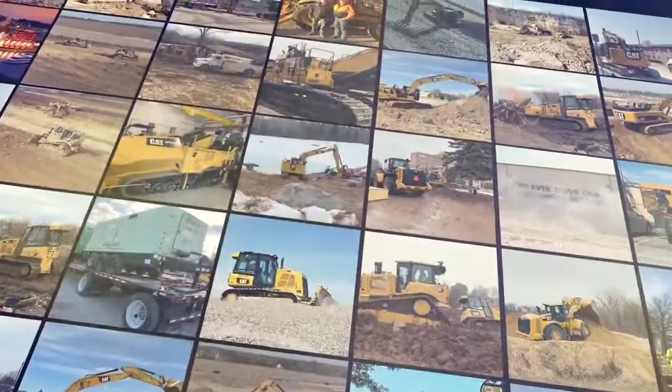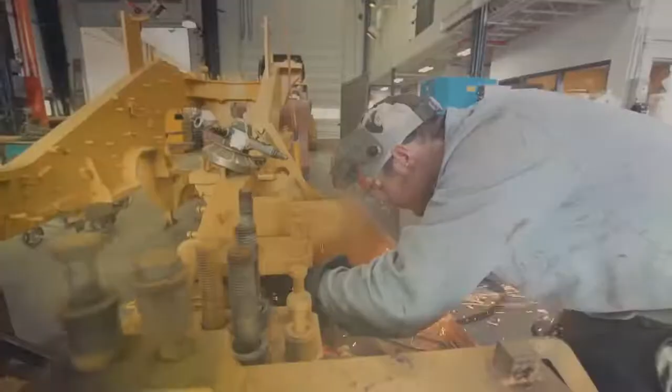In these challenging, uncertain, uncharted times, you stand strong. No matter the conditions you face, you get the job done. You are the backbone of our communities. You are the hardworking men and women that continue to build. We're honored to call you our customers and our employees. We thank you for the work you've done and the work you continue to do. Together, we'll get through this.

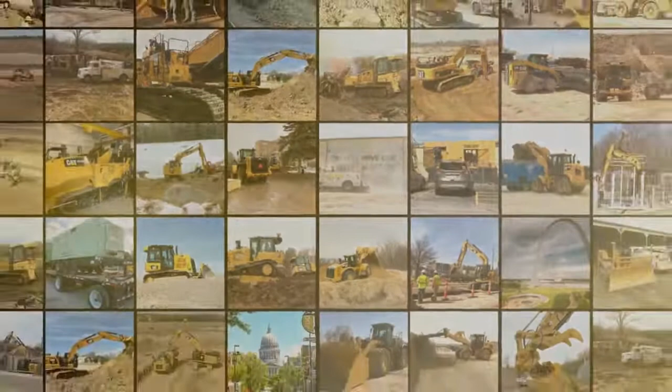Hi, good morning. Some exciting things happening down in St. Louis City. We've got the new soccer stadium being built, we have NGA West, and we also have Downtown West. So there's a lot of projects coming about here with road work in St. Louis City.

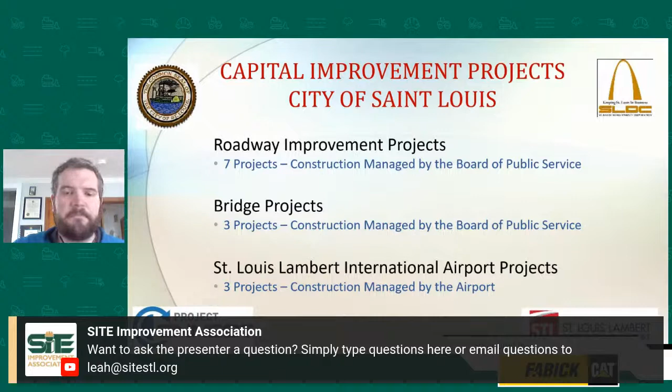The first project we're highlighting today is the Louisiana Calm Street improvements project. This focuses on the stretch of Louisiana between Gravois and Meramec, a north-south corridor in the southeastern part of the city. It will focus on retrofitting traffic calming measures such as speed humps, traffic circles, bump outs, and similar features. It will feature the business districts on Meramec, Chippewa, and Cherokee, as well as the Gravois and Marquette parks that it passes by. We expect that one to go to bid in the next several weeks, though I don't have an exact date yet.

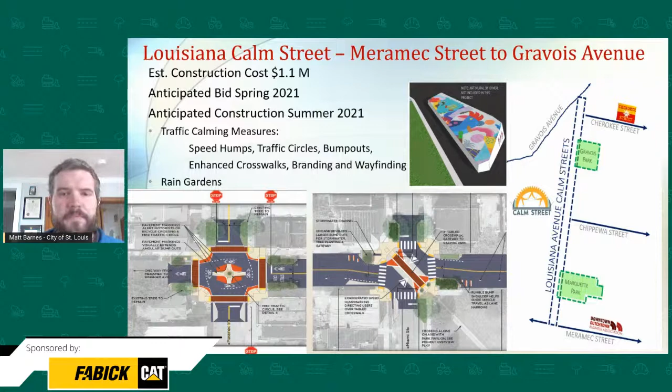Next up is the I-64 at Jefferson City Streets project. This corresponds with the MoDOT work on I-64 as well as the MLS Stadium project, and features the city streets portion. You can see on the map several of the different streets where we'll be making improvements, streetscape amenities, bump outs, lighting, multi-use path, signal improvements, transit, and Metro bus stops.

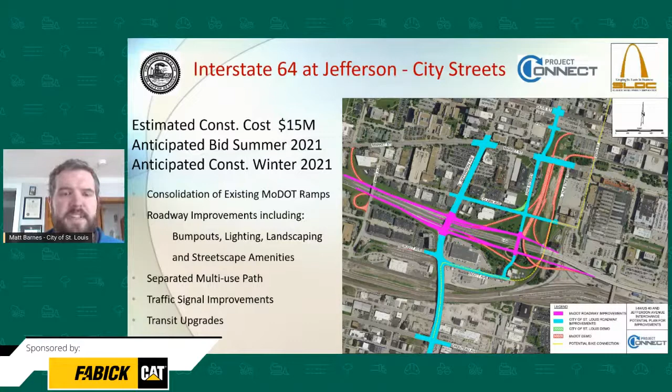The next project is the 7th Street improvements, Washington Avenue to Walnut. This is a fairly standard streetscape project improving a north-south corridor in downtown. It will improve access to the convention center main entrance, and includes bump outs, sidewalks, ADA and signal improvements, landscaping, and all the standard streetscape project parts.

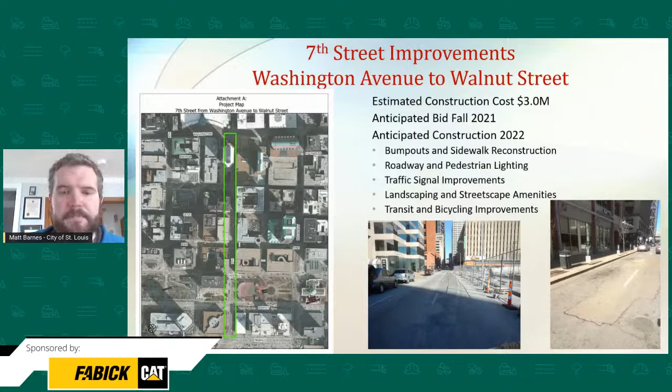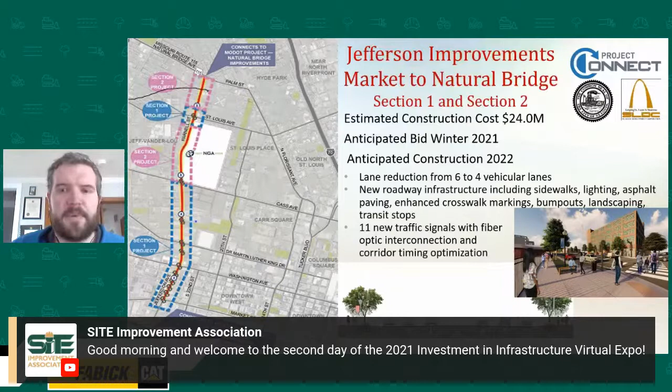Next up, we have Jefferson Improvements, Market to Natural Bridge. This project will build on what was done in the previous Jefferson project, expanding the improvements north up to the new NGA campus and facility. The sections shown on the map relate to different federal funding sources, but it's all being planned and built together. It's all being bid, and it will be bid and built at the same time.

The next roadway project we have is the Goodfellow Signal Interconnect, Delmar to Halls Ferry Circle. This will improve the signal and fiber network as well as ADA access along a main corridor in the northwest part of the city.

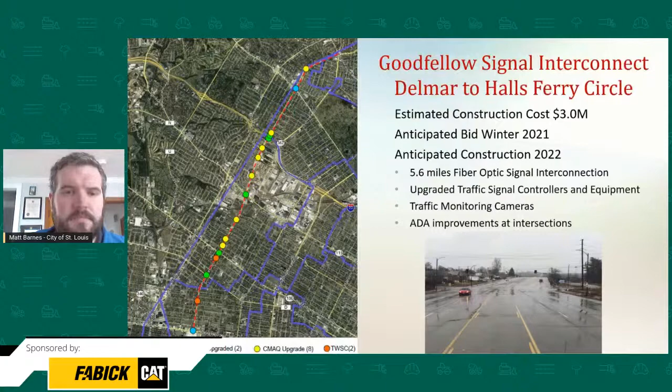Next up, we have the 20th Street multimodal improvements, Market to St. Louis Avenue. This will improve the pedestrian, bike, and transit links along this corridor. It will also provide an additional link between the improvements made on Jefferson and I-64 downtown west as part of the other project, up to the neighborhoods around the NGA.

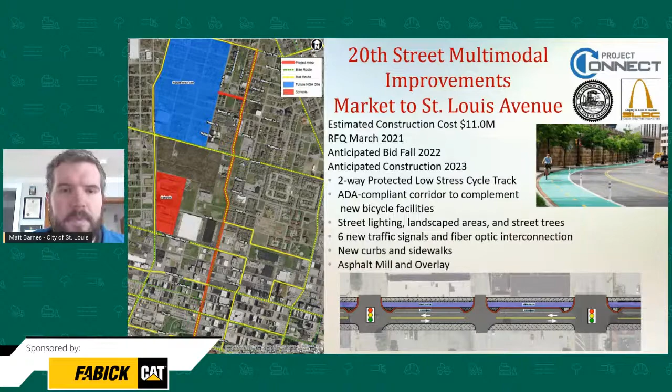Next up, we have the Tower Grove connector: Tower Grove Ave, Magnolia to Vandeventer, and then Vandeventer, Tower Grove to Sarah. This project includes a 2-way protected cycle track, and it'll improve the bike and pedestrian link between Tower Grove Park and the surrounding neighborhoods, including the Forest Park Southeast neighborhood, commonly known as the Grove, and then the Central West End and SLU campus. We actually started a little bit of the work at Magnolia as part of a project about a year ago, doing intersection improvements around Tower Grove Park. We already installed a bike signal and other features for that layout, but now it'll finish off going north there.

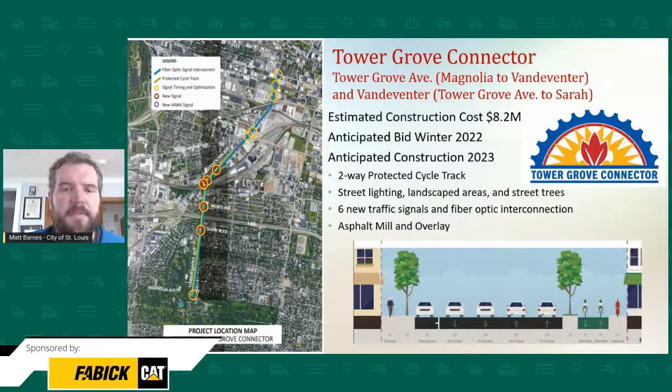The first bridge project we have coming up is the Hamilton Bridge reconstruction. This is an area just north of Forest Park. It's the bridge that will be fully replaced above the Metrolink tracks, which will require coordination with Metro since we'll be working on their right of way.

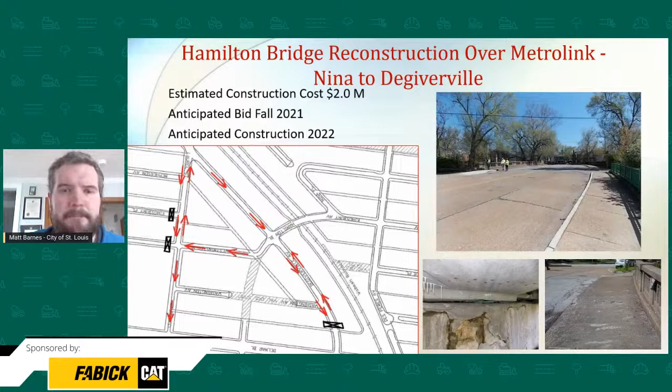The next bridge project is the Southwest and Columbia Bridge reconstruction. The Columbia Bridge, if you're familiar with the area, is on the eastern edge of the Hill and is currently closed. This project will involve tearing down both bridges and replacing them with one new bridge that will have a higher clearance for the railroad. This work will need to be coordinated with the railroad during construction, which I believe is Union Pacific, the same rail line we dealt with on the Kings Highway Bridge project a few years ago.

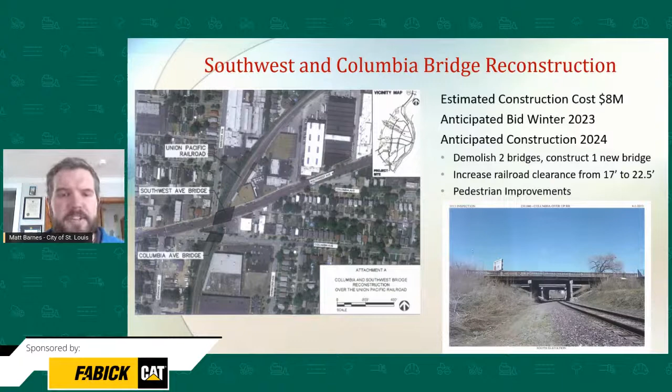The last bridge project on the BPS side is the Compton Bridge reconstruction, Chouteau to Spruce. This is a very, very long bridge that we're going to shorten using MSE walls. It goes over the rail yards and Metrolink tracks in the area near the Grand Metrolink station, if you're familiar with that area, and it will require coordination with the various rail lines and stakeholders underneath there.

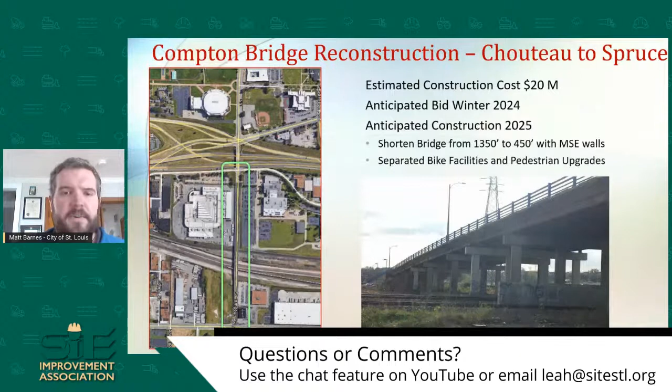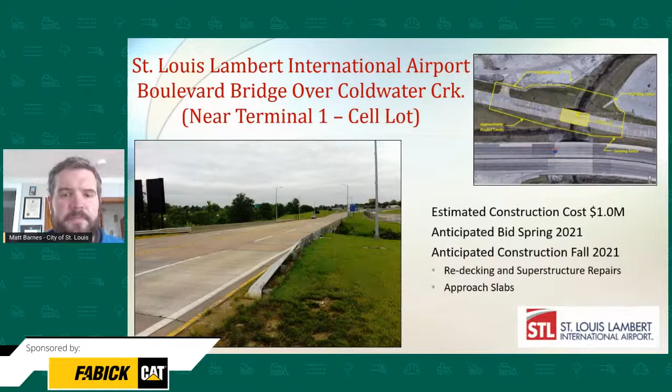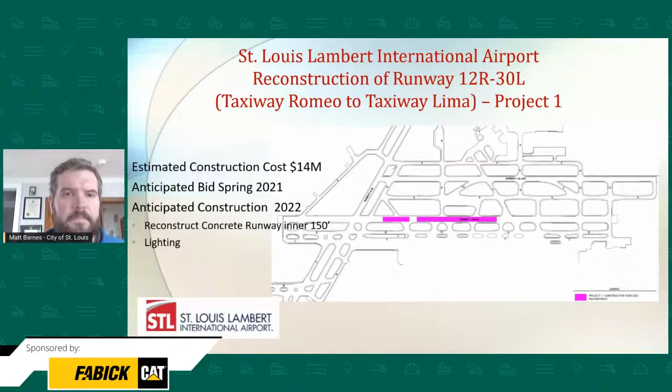The next two projects that we're featuring out at Lambert are airfield side projects that require all the extra safety measures to work on the airfield. They're both related to the reconstruction of runway 12R 30L. The first project, the area of work is highlighted here and that'll be included on this project. The second project on runway 12R 30L involves this area shown in the highlighted section of the image here.

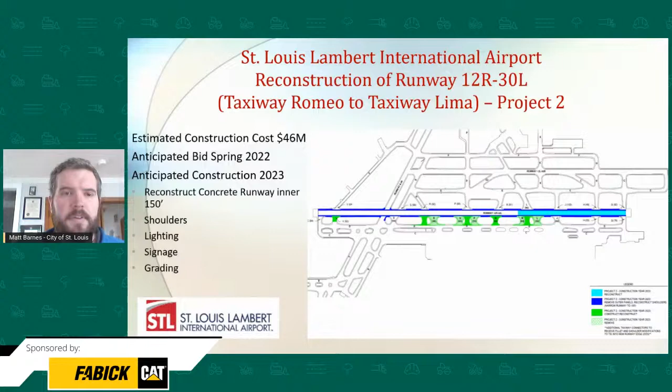And that is all we have. Thank you for your time this morning. If you have any questions, let me know.

All right, thank you Matt. I'm looking over at the questions. I think you might have escaped without having any questions to answer. So good for you, Matt.

Nice presentation, a lot of work going on in St. Louis City. We hope that the downtown area comes back to life after COVID. I'm sure it's been pretty odd down there without thousands of people going to Cardinals games or Blues games. The nice part is you don't have all the traffic in there to get the road projects done. So let's hope we can get that completed and get everyone back together. Yeah, I know the street department did a bunch of paving this summer without all the other events going on.

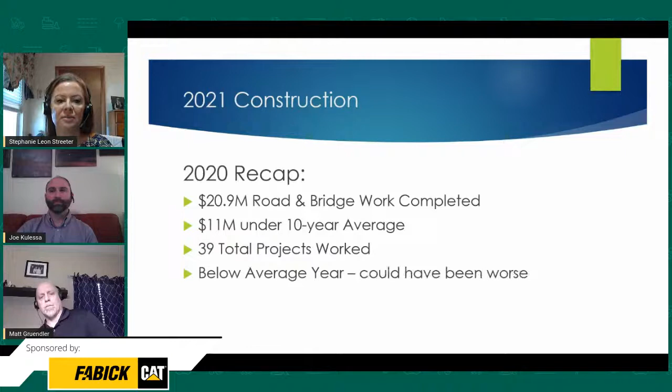In 2020, we were able to complete $20.9 million of road and bridge work. But as I indicated, and as you saw on the graph, that's $11 million under our 10-year average. It's 39 total projects worked. It was a below average year, but it could have been worse. And thankfully, we weathered 2020.

Besides COVID, some of the things we're up against is just funding for transportation in general. St. Louis County has, over the course of time, invested a lot of time, sweat, tears, and money to build up the transportation system that we have.

We have over 3,100 lane miles of road, 1,300 miles of sidewalk, over 600 signals, and nearly 200 bridges. So we have a lot of infrastructure in the field. We value that at $1.78 billion.

So it's worth investing, and we're at a point in our process where we're having to do more preservation work. Our operating budget is about $55 million on the transportation side. We would love to have an appropriation level for capital projects at $71 million, and if we did, we'd have $126 million to bring to the table. But that's just to maintain the status quo.

When you look at the revenue we have now and going forward, we're going to be flat. We have transportation sales tax, gas tax, property tax, franchise fees, and fees from permits and interest on money held that are generally flat. Maybe some are slow to increase, some slow to decrease, but generally we're flat.

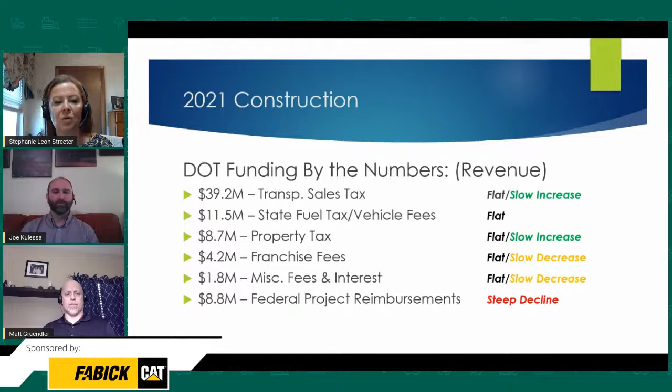So all of those funding sources combined yield about $74.2 million of revenue, which is great—that's nothing to sneeze at. But as compared to our needs, it is short.

And so what we end up doing is the needs don't go away, but instead of appropriating the $71 million that we need to appropriate, our highest year in 2018 was nearly $42 million. But that was the highest year. So we don't appropriate what we need to.

Obviously, when you appropriate dollars, that eventually leads to construction activity in the field. And so, when you can't appropriate what you need, you don't do as much as you need to in the field. So what's in store for 2021 for St. Louis County?

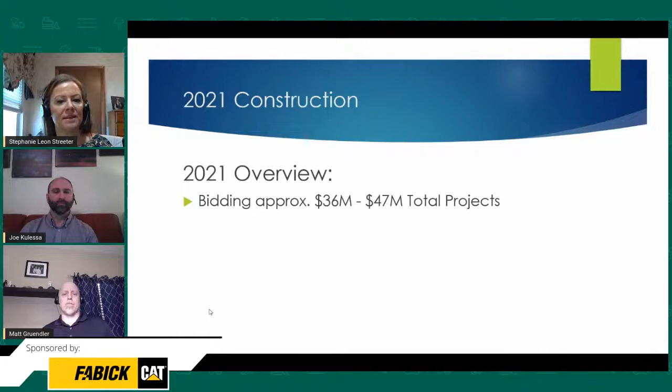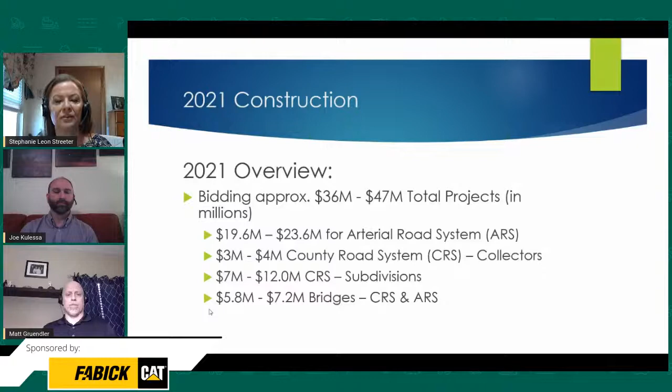We do expect to bid about $36 to $47 million of work, which is good. If we hit the high side on $47 million, about $24 million goes to our arterial road system projects, about $4 million for collectors, $12 million for subdivisions, and $7.2 million for bridges on both the CRS and ARS side. So we have a little bit less than $1 million for signal and miscellaneous work.

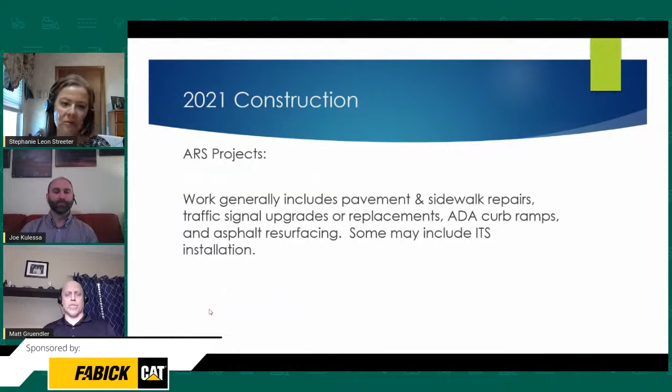So when we look at what we're actually intending to do on the ARS projects side, just keep in mind that our ARS work is usually pavement and sidewalk repair, signal upgrades or replacement, ADA improvements such as at our curb ramps, some asphalt resurfacing, and some ITS project installation.

This is one of two slides, 12 projects in total. The first three, I want you to take note of. The bid opening is expected spring or summer of 2021, so those are the first out of the gate on the ARS project side. They do not have federal funds, which means they're county funded and will have MWBE requirements. That's ARS improvements area A, infrastructure improvements on Midland, and Barrett Parkway area improvements.

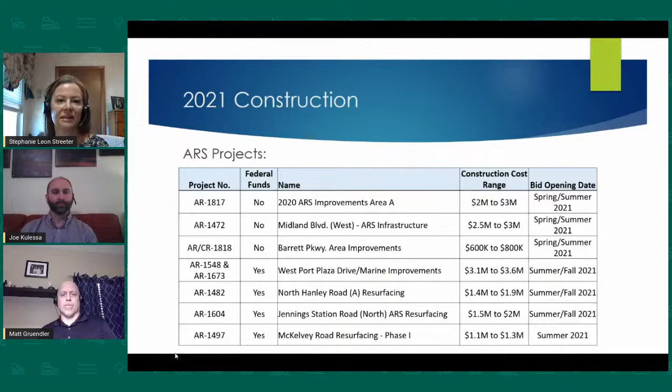And please note, on all of the ARS projects with federal funding, those dates are very much in question right now due to COVID closing the courts. We have a number of property acquisitions that need to be completed before those projects can be let. We just had another update yesterday that we still don't have any information on when the courts are going to open to move those projects forward.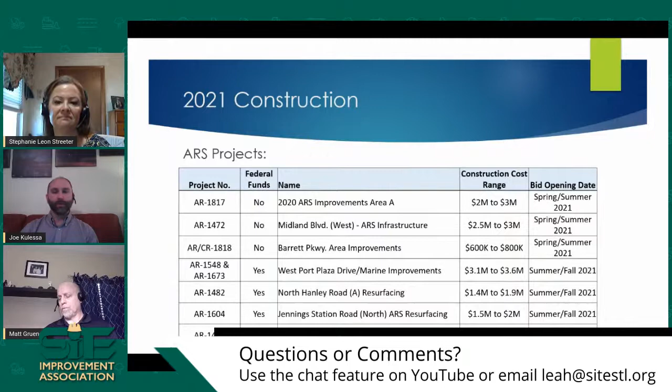So those dates, unfortunately, are probably going to slide back on a number of those projects.

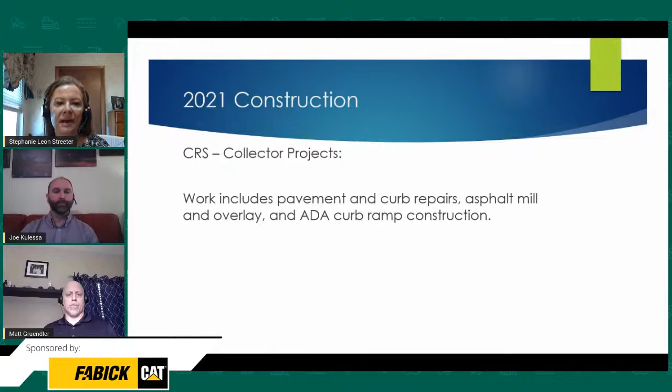On the collector side, that is pavement and curb repair, mill and overlay, curb ramp repair and construction to meet ADA requirements. We have two jobs, not federally funded, so MWBE goals apply. Bid openings are expected spring of this year. Area B is South County: Suisun Hills Drive, Pottle Avenue, and Keller Road. Area C is somewhat south and west: Hannah Road west, Valcourt Avenue, and Edian Park.

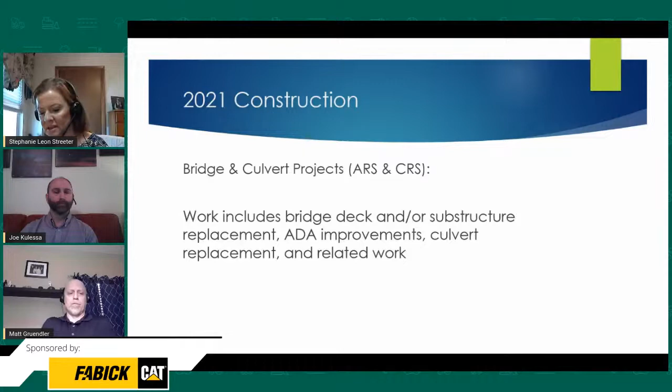Our bridge and culvert projects span the ARS and CRS system. We're talking about bridge deck replacement and/or repair, substructure replacement, ADA improvements, etc. This is 7 projects, and it's a mix—some federally funded, some county funded. The two anticipated to have earlier bid openings are the first two, so MWBE goals apply: Lockwood Avenue Culvert and Lackland Road Culvert. The other bridge projects fall later in the year, and in some cases early 2022, such as Wyncrest Drive Bridge.

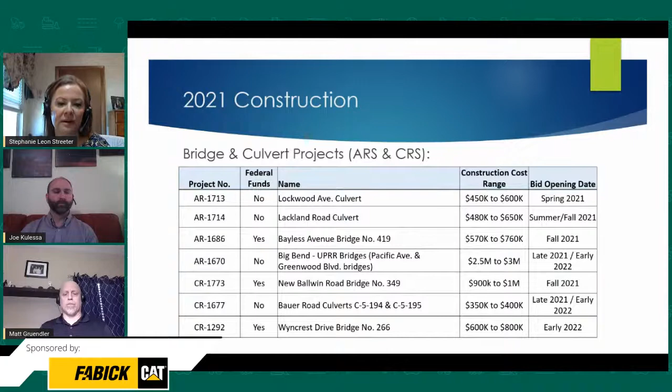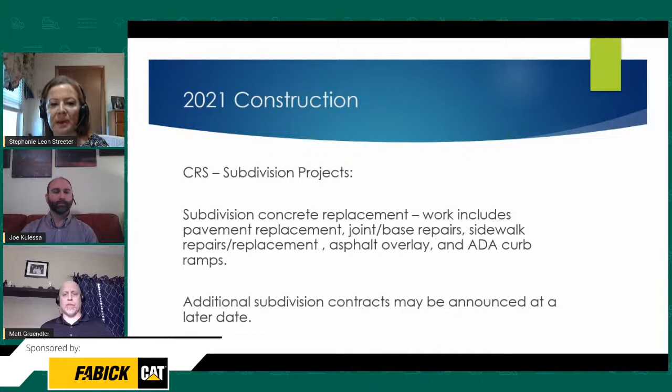Our subdivision work—we'd love to do some wholesale replacement since some of our subdivisions have been in place for many years. But this is more spot concrete replacement, as much as we're able to do, and as the requirement presents itself. We also have joint and base repair, sidewalk repairs, some asphalt overlay, and more curb ramp work.

We have 3 areas: C, B, and D. C had a bid opening already in January, and B and D have bid openings coming very quickly—one's March 3rd, and one's March 17th. They're not federally funded, so MWBE goals apply.

I have the list of subdivisions, but for each one there's a number of them. So if you want that particular information, ask the question or ask us post this expo, and we can provide you that information, provided we're not in any period of solicitation. Those are currently in solicitation, so those would be under a cone of silence. Please go review the packages online and email questions to the authorized contacts.

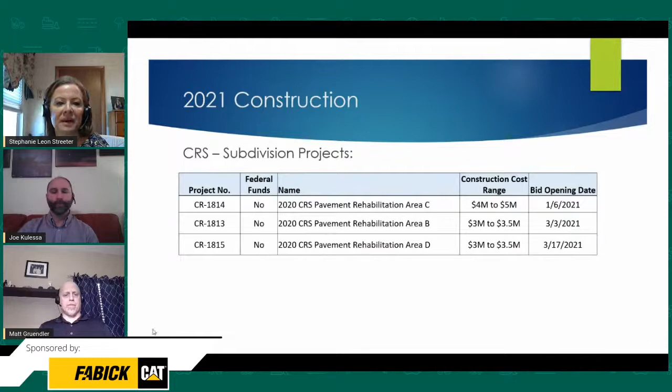Thank you, Joe—they came to mind, so I'm glad I said it. Our miscellaneous projects include a pedestrian signal at Music Avenue, bid opening March of 2021, and then guardrail on Baumgartner Road to come later this year. No federal funds, so MWBE goals apply.

In these challenging, uncertain, uncharted times, you stand strong. No matter the conditions you face, you get the job done. You are the backbone of our communities. You are the hardworking men and women who continue to build. We're honored to call you our customers and our employees. We thank you for the work you've done and the work you continue to do. Together, we'll get through this.

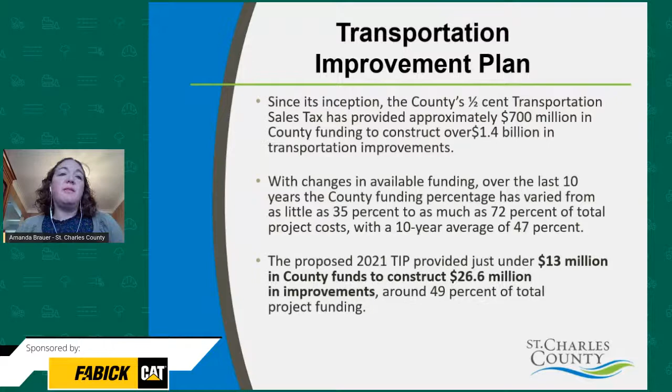The proposed 2021 TIP provided just under $13 million in county funds for $26.6 million in improvements throughout the county, so 49%. This was kind of a lower year in terms of what we distributed. However, the previous year was very big with the I-70 design build—the county contributed $10 million to that, and several other big projects. So we kind of used this year to catch up, but we have not seen a lull in funds, and we're still steadily seeing about $30 million a year in sales tax revenue for transportation projects.

So the 2021 to 23 Transportation Improvement Plan includes over 60 projects and approximately $80 million in sales tax funds for construction projects throughout the county. Just remember, when I say 80 million in half-cent sales tax funds, that means the overall projects are probably around the $160 million mark or more. This is just a list of the overall projects in the TIP and what the county's contribution is. I'm not going to sit on this for too long, but if you want to go back and look at the presentation, you can do that and let us know if you have any questions on any of these.

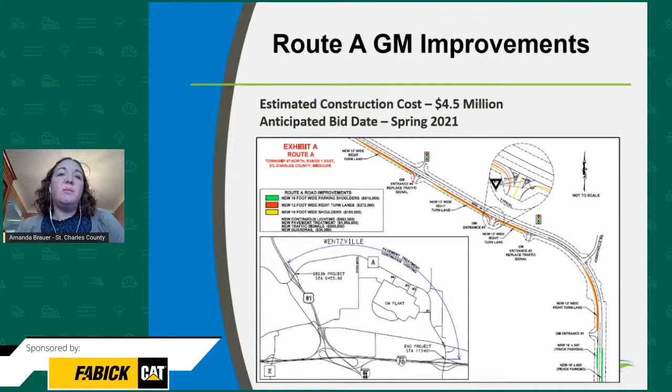Our first project is Route A, GM improvements. This is a MoDOT route. The county submitted for governor's cost share on this project and was awarded about $4 million in cost share funds. The estimated construction cost is around $4.5 million, with an anticipated bid date of spring of 21. This includes new parking shoulders, right turn lanes, additional 10-foot shoulders, lighting, pavement treatment, traffic signals, guardrail, and fiber throughout the corridor. This is a significant project, and we're excited to get these improvements done for the GM plant and all that they're doing out there.

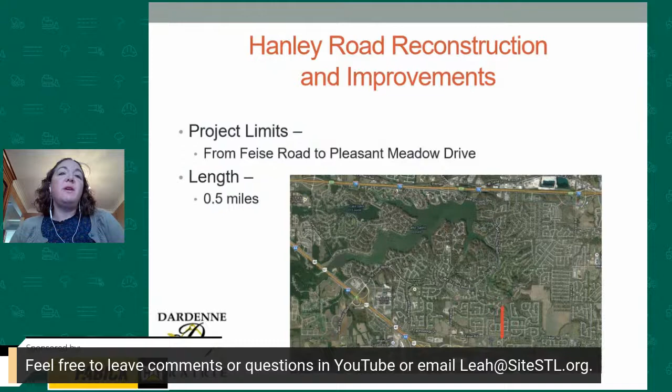From Dardenne Prairie, they will have the Hanley Road reconstruction and improvements from Feise to Pleasant Meadow Drive. This project is replacing two existing 10.5-foot wide travel lanes with new 11-foot wide travel lanes, enclosed storm sewers, and sidewalks, with an estimated construction cost of $1.5 million and a bid date of spring of 21.

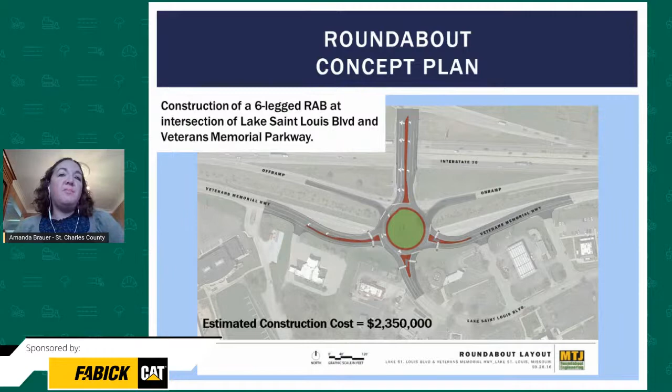Lake St. Louis roundabout at Veterans Memorial Parkway. This is the construction of a 6-legged roundabout at the intersection of Lake St. Louis and Veterans Memorial. The estimated construction cost is $2.35 million. Right-of-way acquisition is underway, and I believe they anticipate a MoDOT letting in March. I believe that's still on schedule for that date.

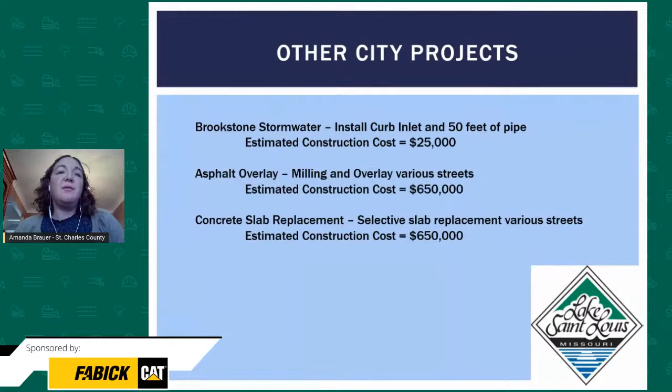Other city projects include the Brookstone stormwater project, installing a curb inlet and 50 feet of pipe for $25,000; asphalt overlay for $650,000; and concrete slab replacement for $650,000. I heard back from Lake St. Louis, and they provided this information. The other cities likely have similar projects that I don't have information on, so always look at the city's website or reach out to the cities individually to see what maintenance projects they have going on.

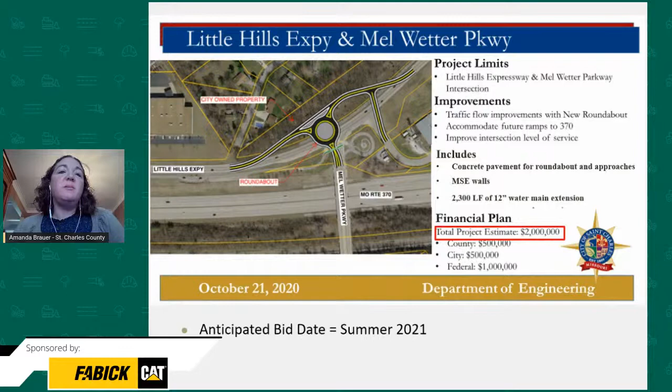City of St. Charles has the Little Hills Expressway and Mel Wetter Parkway roundabout. This will accommodate a future ramp to 370 and improve the intersection level of service. It includes pavement for roundabout approaches, MSE walls, and 2,300 linear feet of 12-inch water main. The estimate is $2 million, and the anticipated bid date is summer of 2021.

The Zumbehl Road bridge culvert replacement between Regency Parkway and Dierbergs. This is a new reinforced concrete box culvert. Construction is expected to begin in the fall when federal funds are available. This has an estimated cost of $2.5 million.

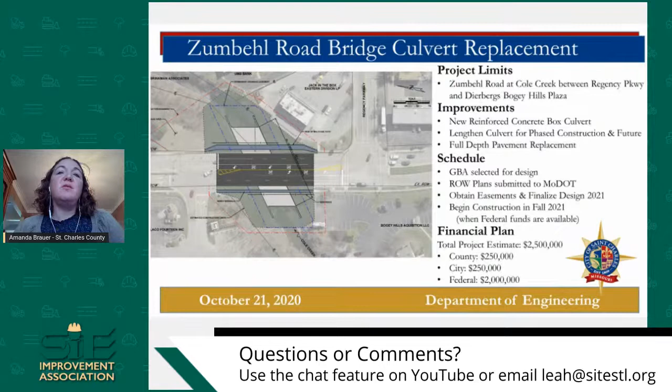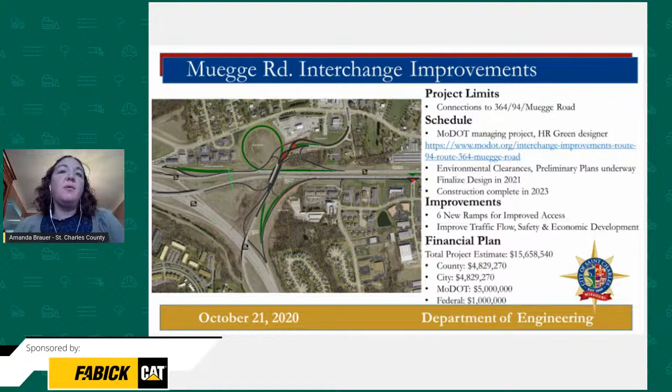Fall. Muegge Road interchange - MoDOT is actually handling everything on this project, but I wanted to give it a quick mention. They may have talked about it yesterday, but the county has funded this project through various sources. This is a $15.6 million project - I think that might be the total cost, not just construction - and this has also been expanded. MoDOT has added an overlay for all of 94, which will be part of this bid. My office went after $2.4 million, or $1.2 million federal with a $1.2 million match, to add an additional lane in the segments where it wouldn't be 3 lanes. On the MoDOT website it has everything, but this will widen the entirety of 94 to 3 lanes in each direction between 364 and I-70. This is a huge project. It should be bid in the fall, and we're very excited about this.

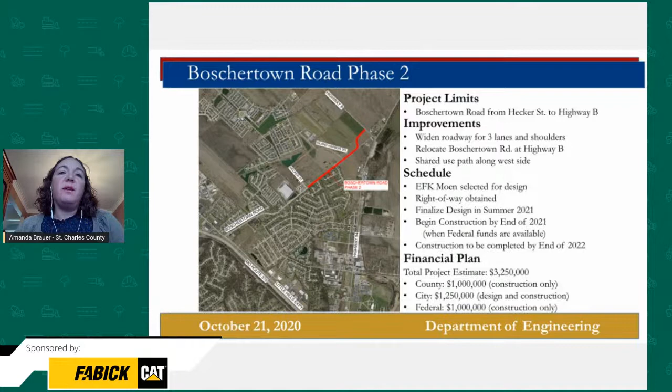Boschertown Road Phase 2 will widen the roadway to 3 lanes with shoulders and relocate Boschertown at Highway B. Again, this will be bid in the fall when federal funds are available, and is estimated at $3.25 million.

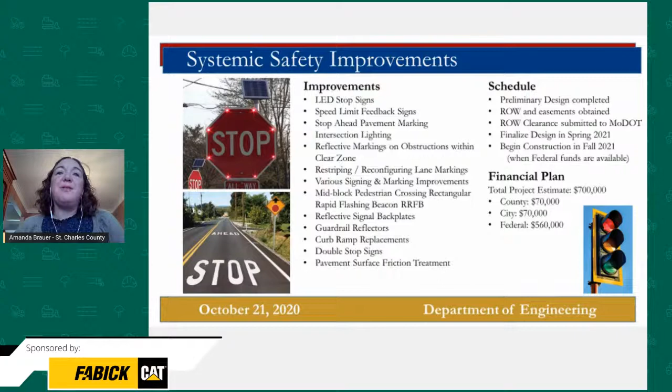Systemic safety improvements in the city of St. Charles - this is various items throughout the city at various locations. Again, this will begin in fall when federal funds are available, and the project estimate is $700,000.

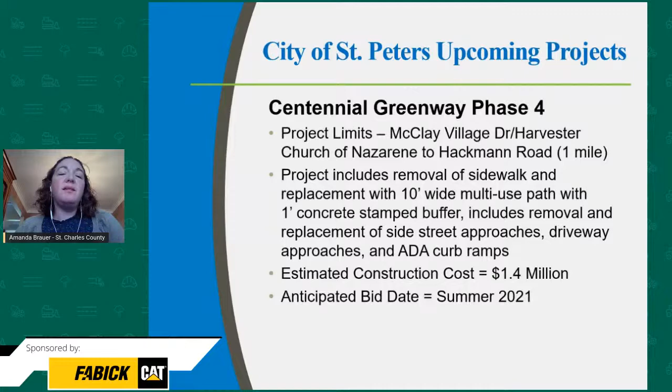City of St. Peters has the Greenway Phase 4 project, Centennial Greenway. The project limits are McClay Village Drive to Harvester, or to Hackmann Road, about 1 mile. The project includes removal of sidewalk and replacement with a 10-foot wide multi-use path. Estimated construction cost is $1.4 million, and the bid date is summer of 21.

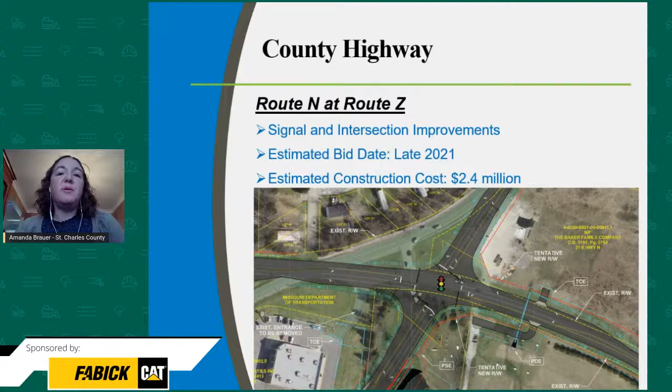They're also working on Route N at Route Z, signal intersection improvements. The bid date is late '21, and estimated construction cost is $2.4 million. This will realign the intersection and add a signal, making it much safer and more efficient out there.

Gutermuth Road Phase 3, east of the new interchange to Motherhead Road. This will replace the existing 10.5-foot lanes with two new 12-foot lanes and a two-way left turn lane, as well as an 8-foot trail. The bid date is late '21, and the cost is $3.6 million.

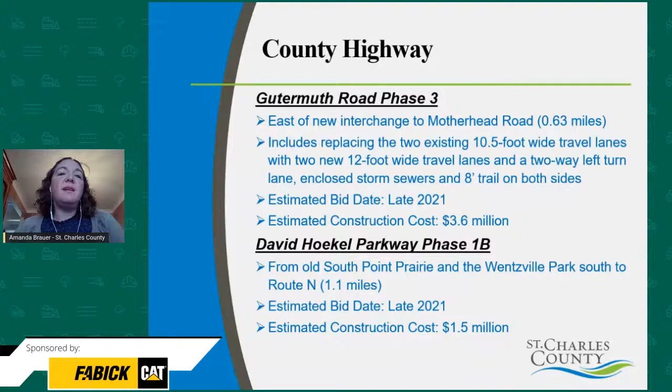David Hoekel Parkway Phase 1B, from Old South Point Prairie to Wentzville Park south to Route N. Estimated bid date is late '21, and the cost is $1.5 million.

Gateway Greenlight, we have another phase that should be coming out this spring. Countywide travel time detectors, count stations, pan-tilt-zoom cameras, video detection, and 12 miles of new fiber. Again, should be spring. I can't remember the cost estimate on that, so I didn't put it on here.

I also wanted to note, like Jeremy said, we have things going on throughout the county. Route N is a huge study right now, and we're hoping to move forward with projects on Route N. David Hoekel Parkway continues to move forward, and sections are being built.

If you go to our website, there's a list of road construction projects, everything that's active, whatever phase it's in, whether design or otherwise. We try to keep those descriptions accurate so that it tells you when to anticipate bids for those. We'll try to even do better about that.

We're also trying to update our GIS mapping to include that same information, so I can definitely forward that along to site as it gets updated. But always go to that website, and definitely let me know if you have any questions or want more information about. I'm happy to help. And I think that's all I have.

Okay, great. So I got a question, and MoDOT touched upon it just a little bit, but the sharp curve in Wentzville, that's been kind of updated on a priority list. Any idea of where that's moving? I know a lot of our members live out in that area, or they travel through there to go to the lake, or just traveling through. So any update on that you can give us?

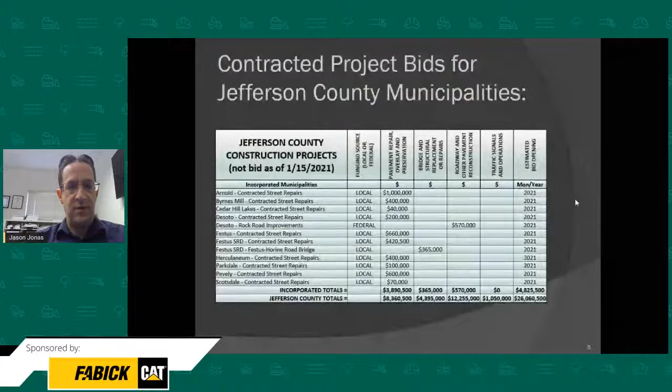In addition, our cities have about another 5. And most of the cities just have contracted street repairs, both asphalt and concrete, not delineated between them. But reaching out to the cities, that's largely what they have going on this year with not many federal participating projects. So if you need any further details about those bid opportunities, you can reach out to the cities themselves.

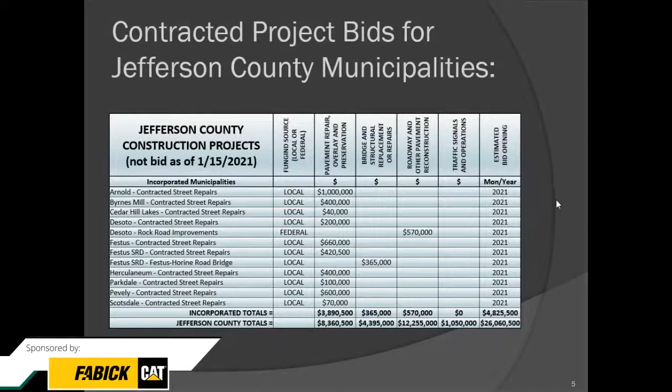So the first one we got going on is Old Lemay Ferry Road. This is a project we had tended to bid out last fall, but got pushed back because of condemnation issues. No real issues with COVID itself, but condemnation kind of held us back a little bit. So it's the same 2/3 of a mile reconstruction, realignment, two intersections.

All three are county roads, Spring Forest and East Rock Creek tie into Old Lemay Ferry, and all be realigned. Old Lemay Ferry will go from 2 11-foot lanes to 2 12-foot lanes with center left turn lane in both directions, and also 3 to 6 foot shoulders with 3-foot curb and gutter throughout. Also, there's a major box culvert that gets reconstructed, replaced, and it's about a 12-foot wide single cell box culvert.

So this project's estimated at roughly $4.3 million, and we anticipate it to be bid out in late spring. So probably the May, June, hopefully May, probably June.

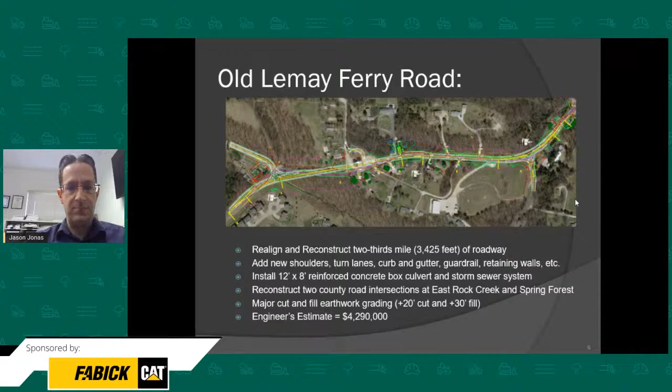Seckman Road, this one was also intended to be bid out late last summer, early last fall. Again, it also faced condemnation issues that have been since resolved. We have authority to advertise. This one should be on the streets in the next week. So look for that real soon.

This is the same project talked about last year, is Seckman K-12 campus, which is a major arm of the Fox C6 school district, is through this corridor, as well as many subdivisions and strip malls and gas stations and whatnot. We'll be overlaying the road, but mainly the improvements is the roundabout at Old Lemay Ferry, Seckman, and Lions Den intersection, as well as 6-foot sidewalks throughout the 1/3 of a mile corridor.

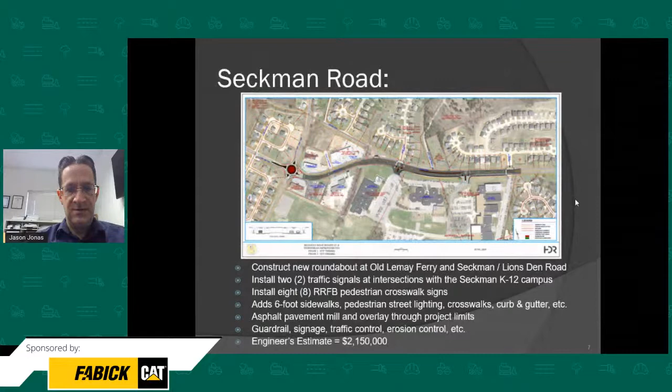And also we'll be doing 2 traffic signals at the entrances to the K-12 campus. So this is estimated at roughly $2.15 million.

Next one is Miller Road improvements. This is improvements to Miller Road at the Spring Forest intersection. It is the other terminus that Spring Forest ends into Miller, and the other one is on Old Lemay Ferry. I talked about 2 slides ago. It's a Y intersection that we want to tee into it to get proper sight distance.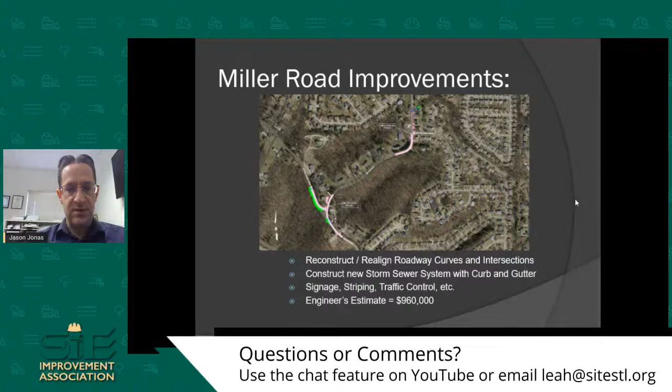There's quite a few improvements along Miller at that intersection vertically that need to be adjusted for sight distance, as well as there's a sharp curve approaching Country Court subdivision to the north end of that project that needs to be realigned. Widening as well with 1-foot shoulders and 12-foot lanes as opposed to the 11-foot lanes now.

This project is estimated at a combined roughly $1 million. And this one should be bid out as well in May or June.

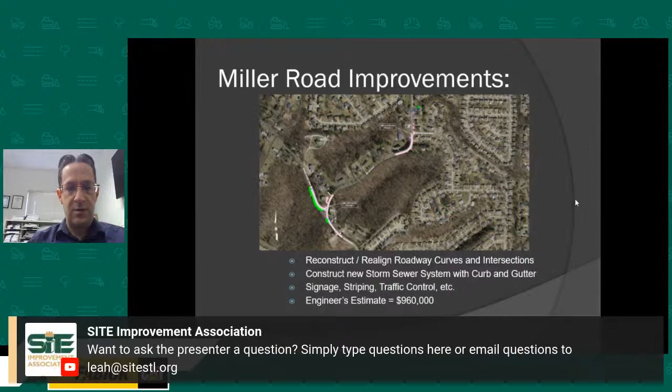House Springs Main Street. This project is going to reconstruct the two 12-foot lanes, and roughly there's two 6-foot shoulders. Those shoulders will be improved. Parking will be improved, so we'll be adding on-street parking, reconstructing the pavement, a minor amount of street lighting, I think 7 or 8 street lights, a closed drainage system,

and minor improvements to the intersection with MoDOT's Route MM. This one is slated to also be bid out in late spring, probably the May-June timeline, and it's estimated at $570,000.

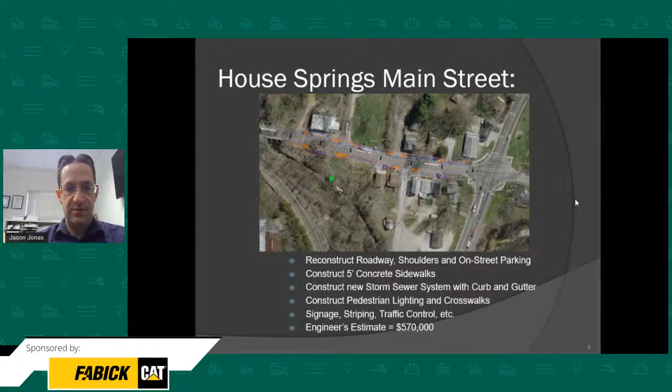Rugli Keepy, we've got a couple of bridges to bid out this year. Rugli Keepy Bridge is in with MoDOT right now for final PS&E approval and obligations, so we're looking for that to be bid out here again in the next month or two.

Standard single span bridge, I girders on this one, minor amount of reconstruction and realignment of the shoulders, $555,000 for that bridge.

Sandy Valley Road Bridge, this one is set to be bid out this week, so look for that real soon. Again, single span structure on this one with I girders, even smaller amount of relocated, reconstructed roadway to get this one in there as a replacement, and $455,000 for this one.

Boyce Lane Culvert. Right now we have a major low water crossing. It's officially called the Slab by the locals, and has been kind of a landmark structure for a generation or so, several decades, of course. Anyway, that structure is starting to break up, starting to crack and fail.

So we're replacing it with a low water bridge, approximately 6 foot higher than the low water crossing now. It still floods under a storm greater than a 10-year event, but the current one floods every time it sprinkles. So it's a major improvement to the area for access, and this structure is slated to be constructed later in the summer. It's a locally funded bridge project only, at $500,000.

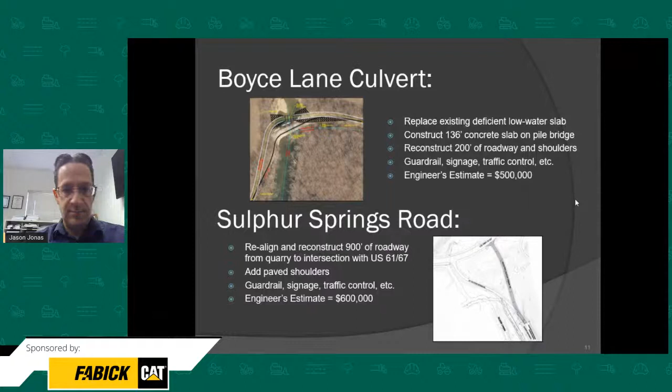They'll have flood-proof access to 61/67. This one is slated to be bid out and constructed starting in the fall, and we estimated it at $600,000.

Lonedell & Tomahawk Road is a realignment of Lonedell as a requirement of the New Henley Woods Phase 2 development in the city of Arnold. We're realigning it just so they can get sight distance and proper entrance requirements for the new subdivision. They'll be adding 2-foot paved shoulders, two 12-foot lanes as opposed to the 11-foot lanes with no shoulders now, and various other features as well. This one's estimated about $450,000.

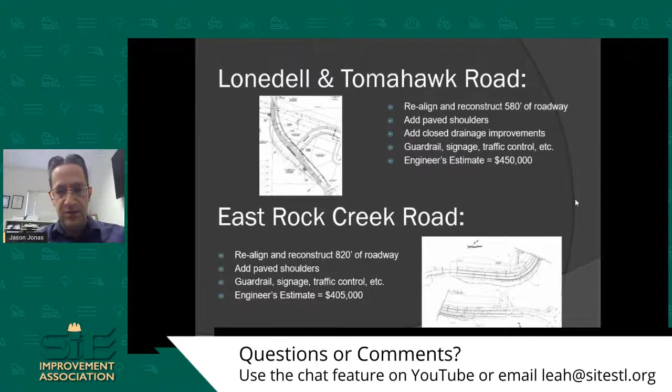East Rock Creek Road. This is a realignment of about 800 feet of East Rock Creek to realign the curve, a high-frequency crash curve that we have along East Rock Creek. We'll add shoulders and other normal features as well, plus a lot of guardrail on that one, estimated at $405,000.

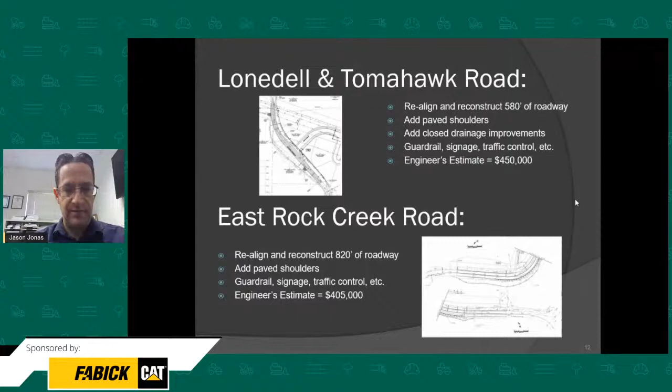And we have a bunch of paving projects, asphalt and concrete. Our asphalt work, we've got about $1.3 million to repave and reconstruct the shoulders on Old 21 from State Route M to State Route A here in Hillsboro, so Barnhart to Hillsboro. We also have a major chip seal project this year, about $1.2 million in chip seal efforts. We also have contracted overlays of about $750,000 on a few different routes. We also have contracted UBAWS for about $500,000 on a few different routes.

And we also have some contracted microsurfacing and crack sealing on various routes for about $250,000. Then we also have some concrete paving work in our subdivisions, about $500,000 in a concrete PCC panel replacement project, and that one should be bid out this week. A few of the others in the asphalt category should be bid out in the next week or two as well.

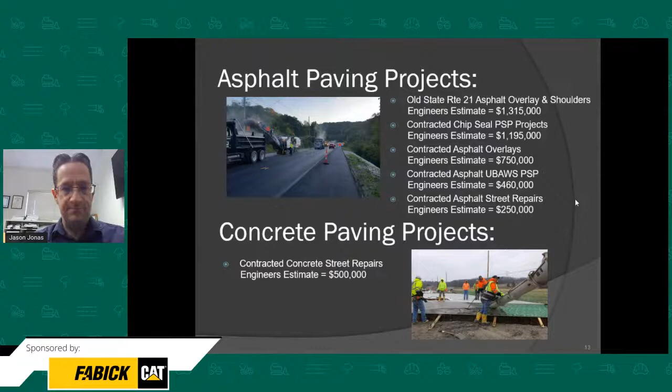We've got a couple of real small projects. In one of our subdivisions we maintain, Northern Lights Drive, has a culvert that has failed, approximately 60-inch diameter by 100-foot long CMP that we're going to replace with RCP. We look to bid that one out probably in May, and that's about $85,000.

We have some drainage repairs along local Hillsboro, mostly just a residential pond that needs to be turned into a drainage detention basin. So mostly a grading project, a small one. $75,000 is what we estimate.

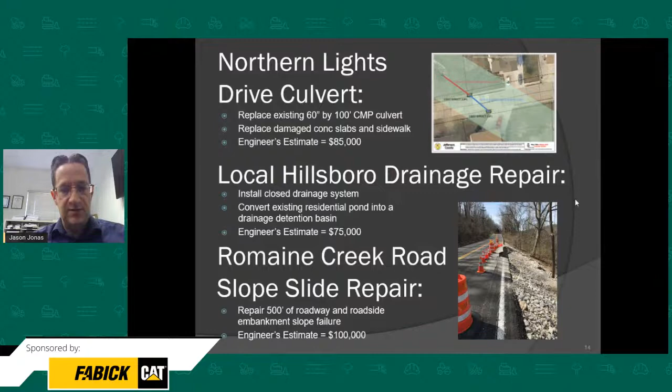Romaine Creek Road, we've got a slide repair. As you can see in the picture to the right, it's been in a slide condition for the last 6-8 months, and we're looking to bid that one out here in the next few weeks. That's estimated at about $100,000.

Some upcoming ones won't be this year, but in the next 15-18 months we'll have High Ridge Boulevard improvements we're looking to bid out in 2022. It's a shared use path, 8-foot sidewalk, 3-foot buffer, new curb and gutter drainage system, and lighting improvements, estimated about $1.85 million.

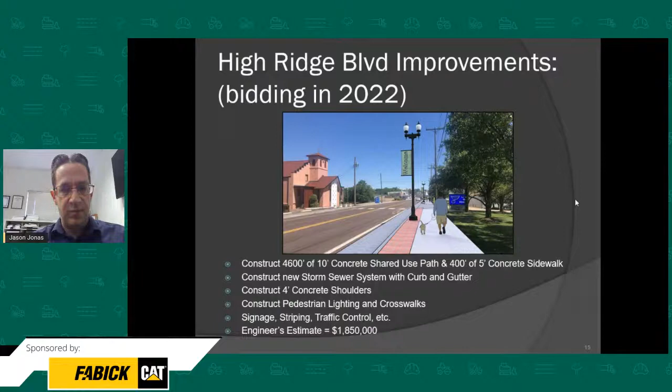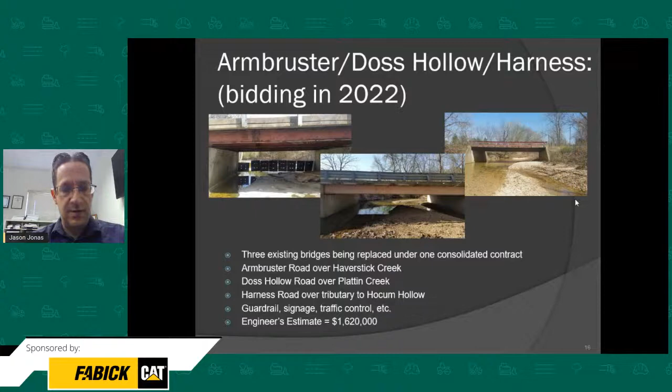We have a bridge combo project that we'll have bid out next year in 2022. Armbruster, Doss Hollow, and Harness are 3 rural bridges that have been packaged by MoDOT into one project, estimated at about $1.6 million.

We've got Hillsboro House Springs Road Bridge that we estimate to bid in 2022 for approximately $900,000.

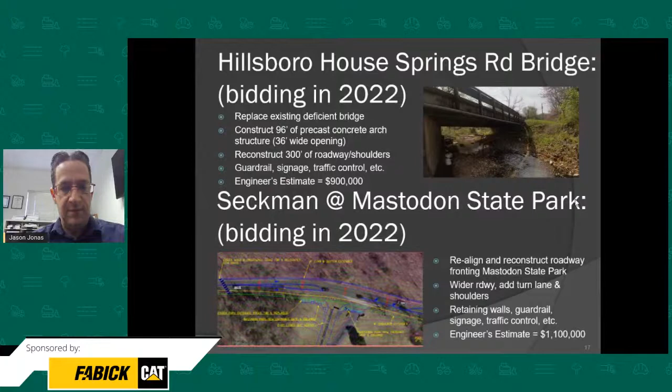We have another major road project along Seckman Road at Mastodon State Park, estimated to bid out next year as well. That's adding a turn lane into the state park, as well as shoulders and widening to 12-foot lanes for Seckman Road itself, an 8-foot shoulder to the south, and a 3-foot curb and gutter to the bluff side north. That's estimated at $1.1 million.

And that's what I have. If you have any questions, you can reach out to me or our technical division manager who runs all of our project efforts, Chris Elan.